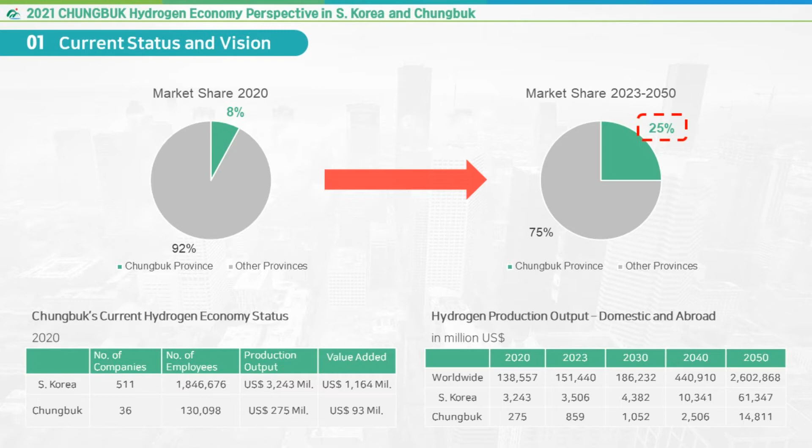As you can see, Chungbuk is placed right at the center of South Korea, giving it a geographic advantage. The Seoul metropolitan area can be reached in less than 1.5 hours. It is home to 25 million people, which is half of South Korea's total population.

Through Chungbuk's hydrogen efforts, the province is determined to become the heart of Korea's green hydrogen production, a hydrogen supply center for not only the Seoul metropolitan area, but for all parts of Korea, and the largest central hub for electric energy-related industries.

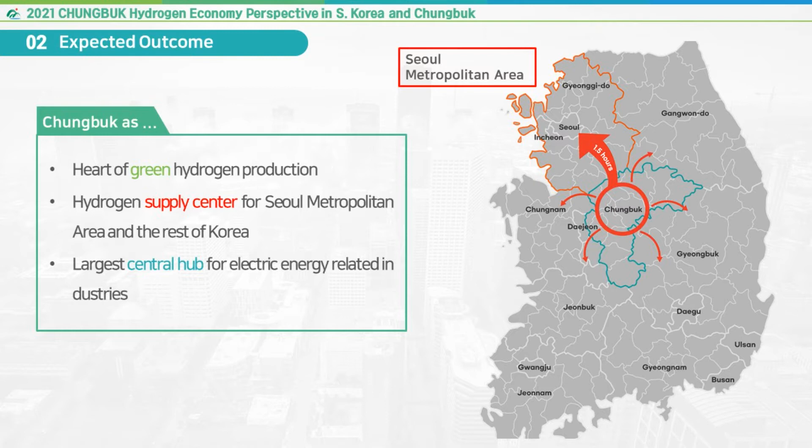Chungbuk Province's hydrogen economy implementation plan considers production, storage, utilization of hydrogen, as well as an overall hydrogen industry ecosystem. The focus will be on CO2-free hydrogen production using water electrolysis and biogas. Chungbuk is working on the construction and commercialization of a large-scale hydrogen storage plant. Because of its central location, Chungbuk is already an important logistics center in Korea. This will be no different for hydrogen.

Concerning hydrogen usage in the province, 40 hydrogen charging stations as well as a 500 megawatt fuel cell power plant will be constructed. The application of hydrogen is to be expanded to trains, vessels, forklifts, and more. Chungbuk is developing a cluster for hydrogen-powered vehicle parts. Training and educating human resources also adds to Chungbuk's hydrogen industry ecosystem.

Lastly, as you might remember from the previous webinar session about the Korean New Deal, Chungbuk is putting a huge focus on hydrogen safety. The province wants to become a leader in hydrogen safety and standardization. This will include safety standards for hydrogen products and facilities using hydrogen fuel.

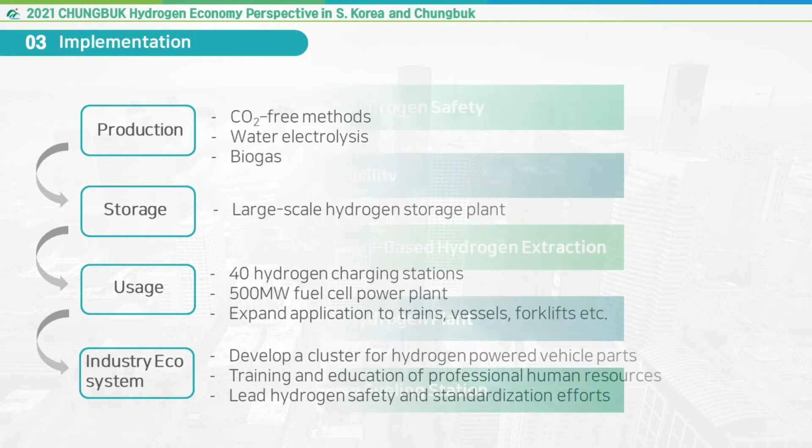In the following, I will introduce 5 strategic projects of Chungbuk Province that are vital for the successful implementation of the hydrogen economy. The first project will establish Chungbuk as the leader of hydrogen safety in Korea. The second project is a hydrogen vehicle one-stop testing facility. The third is concerned with the diversification of methanol-based hydrogen extraction. The fourth is an ammonia-based green hydrogen plant. And lastly, we will look at an on-site biogas hydrogen fueling station.

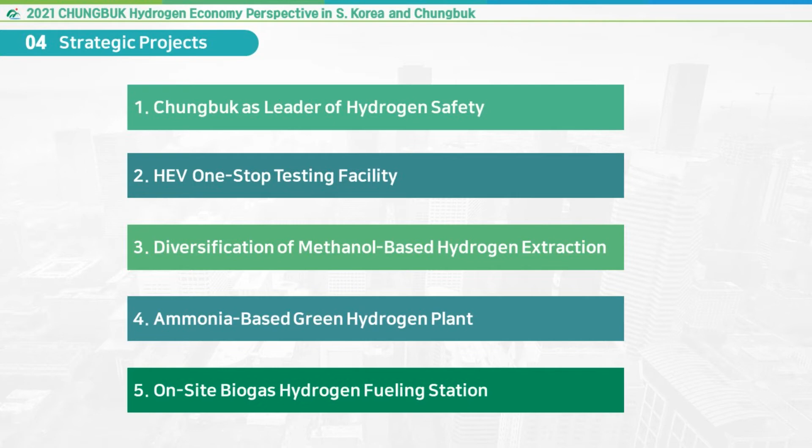What you see here is part of the organizational structure of the Korea Gas Safety Corporation, which is a governmental organization subordinated under the Ministry of Trade, Industry and Energy. Earlier this year, it newly established a Hydrogen Safety Technology Institute. Both the Gas Safety Corporation and the Hydrogen Safety Technology Institute are located in Chungbuk Innovation City, giving Chungbuk Province a great advantage in all issues concerning hydrogen safety.

The institute is in charge of setting safety standards for hydrogen products and facilities using hydrogen fuel. Some of the first projects are a safety demonstration of hydrogen extractor-linked fuel cells for public buildings and a real-time monitoring system for the operation status of hydrogen charging stations.

The institute is also in charge of establishing hydrogen safety training and evaluation centers. Some examples are the Hydrogen Gas Safety Experience Training Center, the Hydrogen Commercial Vehicle Component Test and Evaluation Center, and others. There are many more projects concerning hydrogen safety, so if you are interested, please contact us for more detailed information.

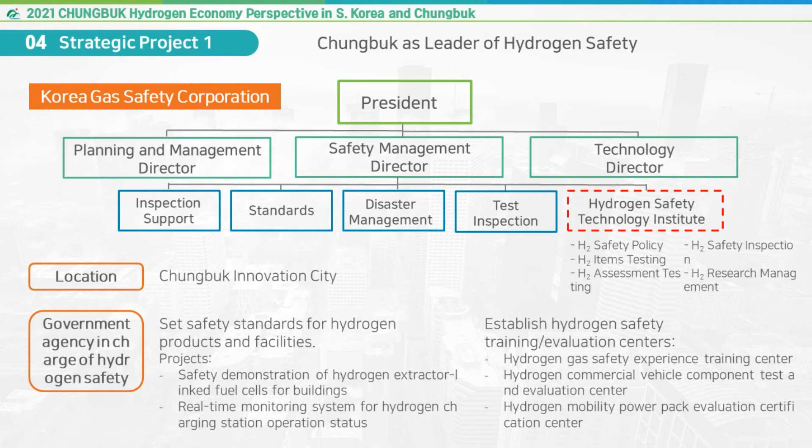The next project is a hydrogen vehicle one-stop testing facility. This facility is being built in various stages, and at each stage, new testing and assessment facilities will be added. Right now, the focus is on building an electromagnetic waves testing facility. Next will be evaluation equipment for 5G and autonomous driving vehicle assessment. And lastly, there will be a reliability testing facility for eco-friendly automobile parts.

The goal of this facility is to support companies in the automobile sector through a customized company support platform. The companies can receive R&D support, they can take advantage of shared equipment, and they can get support in obtaining standard certifications. This one-stop testing facility demonstrates that Chungbuk not only wants to become a leader in hydrogen safety and standardization, but it also actively supports companies in meeting these standard requirements.

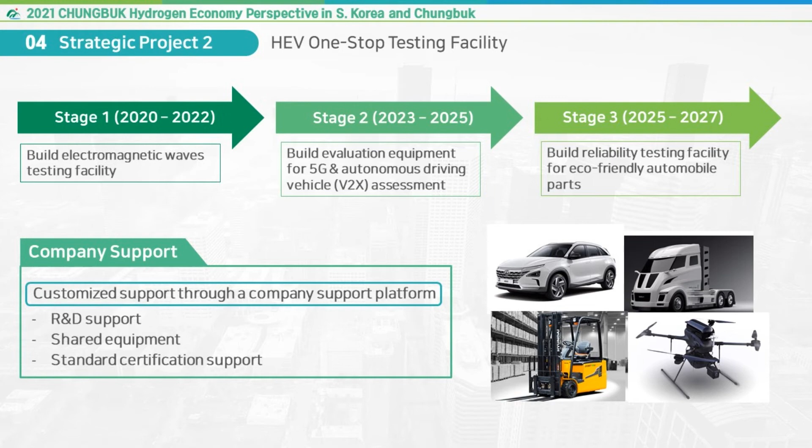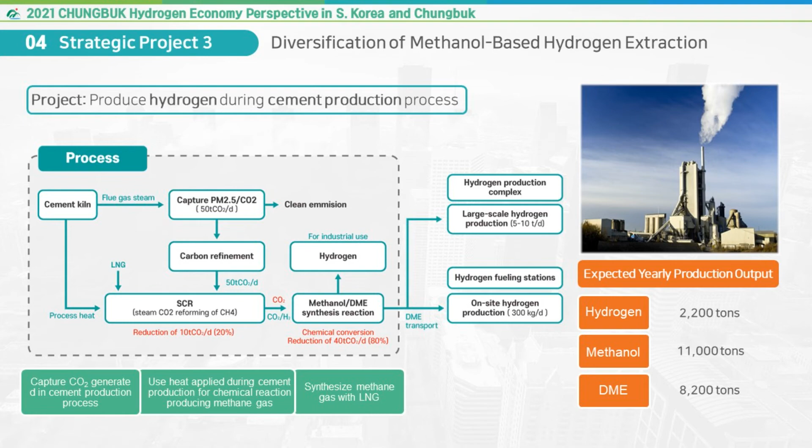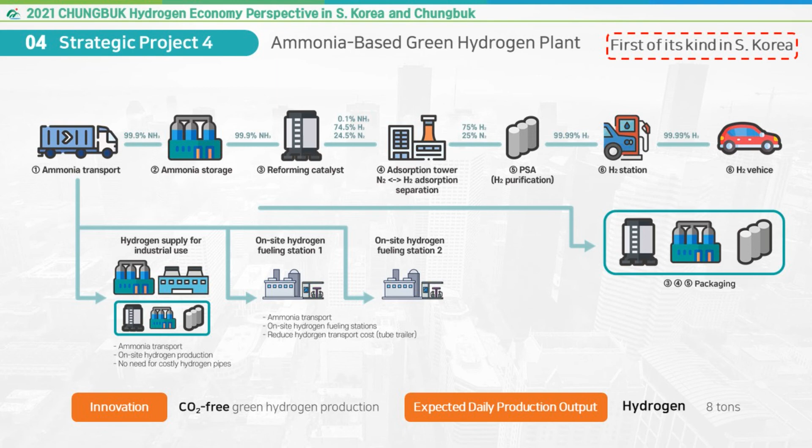This project also contains 2 on-site hydrogen fueling stations that are supplied with ammonia. The expected daily hydrogen output is 8 tons. This ammonia hydrogen project underlines Chungbuk's commitment to green hydrogen production methods that are an actual alternative to conventional energy sources.

These were just a few of many projects. Chungbuk has many more hydrogen projects, especially concerned with hydrogen safety.